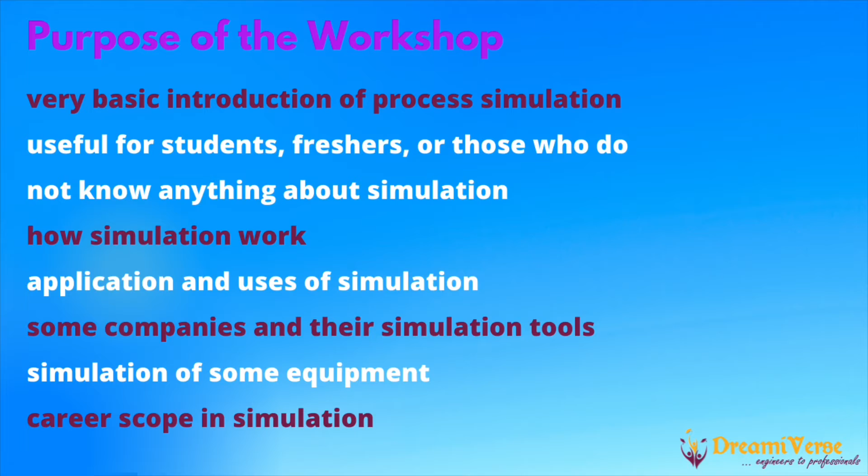So let me start with what is simulation. Now I am not talking about simulation related to the chemical industry specifically. Simulation overall is like a replica. You are making a replica of any actual system that will be used for the purpose it is developed for. This is software based, so definitely it is garbage in and garbage out. You might know the meaning of this phrase, that if you give the correct inputs, then only it will give you correct outputs.

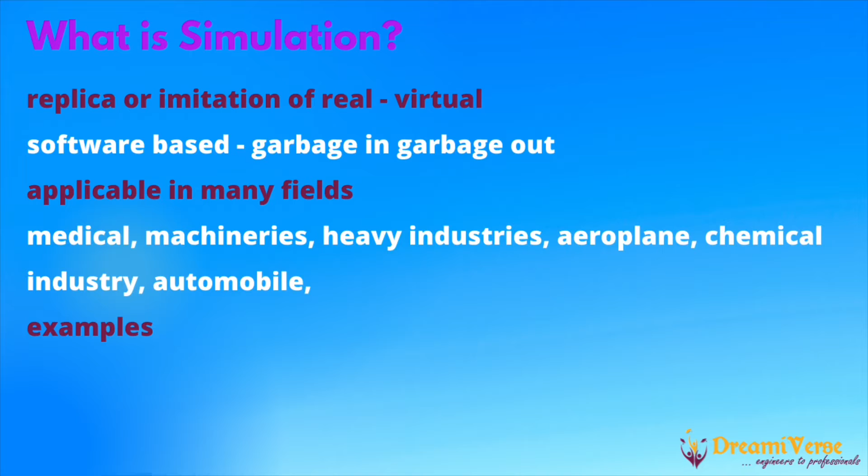So it's software based, and it is applicable in many fields like healthcare and medical, heavy machineries, heavy industries, or to train pilots in how to take off and land aeroplanes. And obviously in chemical industry, automobile industry, big electrical companies also.

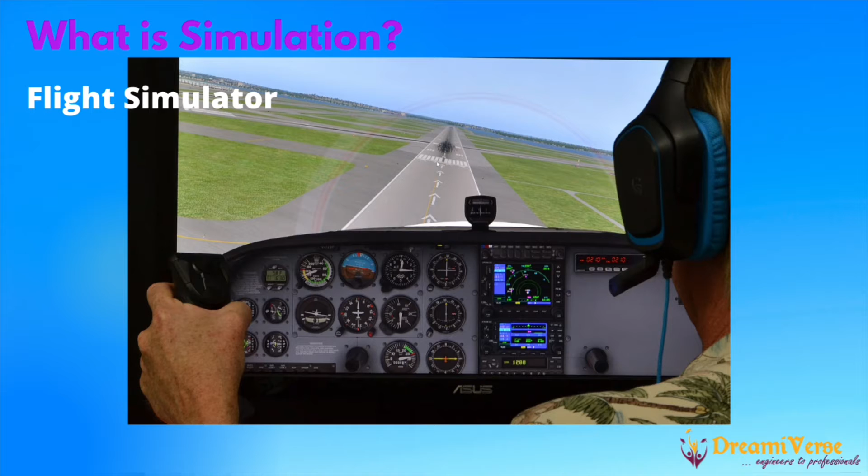Now we will come to process simulations related to our chemical industry, chemical plant. It includes oil and gas, refinery, petrochemicals, pharmaceuticals, so all chemical processes. Simulation is used for design of process or equipment. Design of process means it may have many equipments, or equipment may be one single equipment. Then analysis of the plant operation means we can do analysis of a running plant operation.

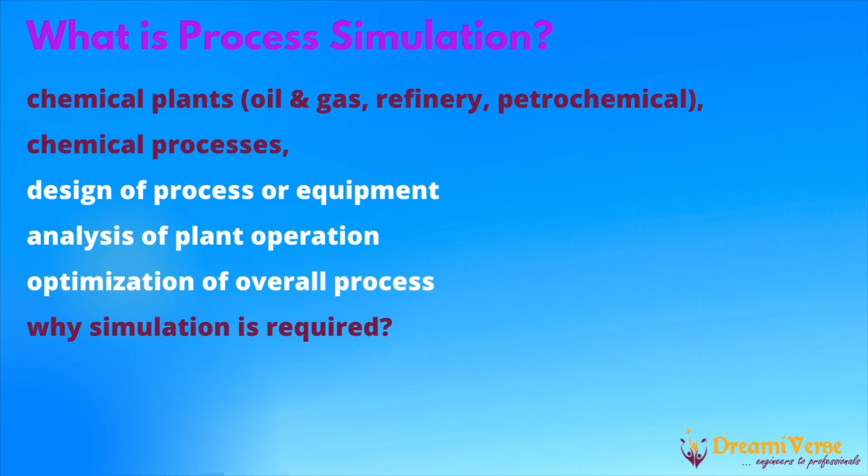So yes, that is also correct. Next is how it works principle. Gopal Krishnan, please mute yourself.

But how it works, behind that there is a program. There are differential equations, whatever we learned in thermodynamics and all the mathematics, all the differential equations we learn in whole engineering. Those are written behind that software, and writing that software is modeling, because many times we see these two words together, like in academic subjects or sometimes in a job profile, simulation and modeling engineer is required, or simulation and modeling as one of the subjects.

So the basic difference of simulation and modeling is that simulation is using the application, and modeling is developing that application. And definitely to develop that application there is a different platform, and for that a computer engineer will be working along with chemical engineering, all the aspects. Basically computer engineering plus chemical engineering together is the development of the software.

So basically the chemical and physical properties of all the chemical components form a mathematical model. This together forms the software, and that we use as a simulation.

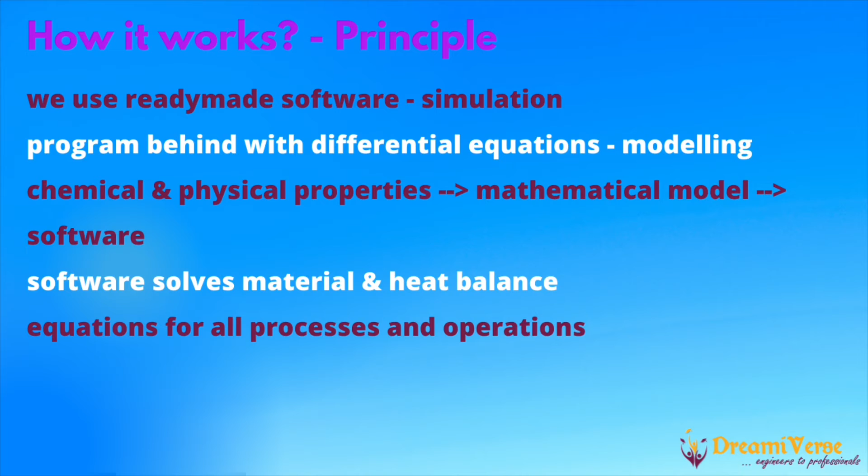Next is simulation. There are two types of simulations. Just let me check some questions.

Excuse me sir. Yes. My name is Naveen. Yes, Naveen Kumar. Sir, I have one basic question. What is the basic difference between simulation and optimization, sir?

Okay, simulation and optimization. Simulation means you are creating a virtual model. Let's say you take one example, heat exchangers. You are simulating a heat exchanger, meaning you have some data, or you need to calculate some data for that heat exchanger. Let's say you are going to design the heat exchanger. So based on that data, based on that requirement, first you are giving inputs and you are trying to calculate what is your requirement. So that, let's say, I can call simulation.

Now one step ahead, there is one exchanger, and the heat exchanger is designed. Let's say I am a design engineer, a process engineer, designing the heat exchanger. So basically, question for everyone again, when we say we are designing a heat exchanger, what exactly are we doing? What is our target point in case of designing the heat exchanger?

To calculate heat transfer area, exactly, yes. So basically we are calculating required heat transfer area for the required process. But required process means what? We have some inlet outlet temperature, inlet outlet flows, and we know the inlet outlet parameters of that chemical what we are using. Based on that I am designing the heat exchanger, and at the end, let's say I came to my result that 200 meter square area is required.

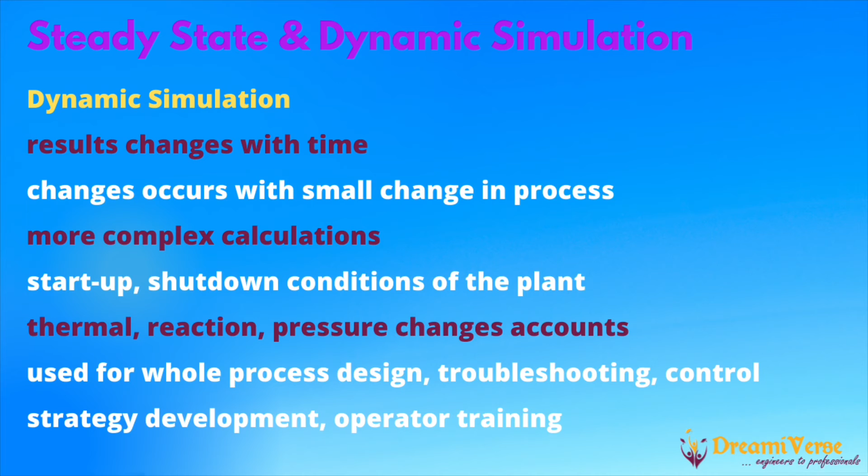And then operator training, I have a next slide specifically for operator training. Operator training simulator, OTS, you might have heard this word. The base for this OTS is dynamic simulation, and as the name itself suggests, it is used to train new manpower, maybe new operators, new engineers, or people transferred from one plant to another.

So we can train the operators for normal startup of the plant, let's say starting from zero. The normal shutdown of the plant, how to shut down normally. Then let's say if there is an emergency shutdown, what should be the actions by the operator. And if the plant is running normally, what parameters need to be monitored. All those things can be done, meaning people can be trained on the OTS.

So this is used for optimization of control schemes and logic validation, as I just explained. APC, advanced process control, is again a kind of part of optimization, we can say.

And what-if analysis means, okay, in most chemical plants it's not the situation that for months the plant runs very normally. There are always problems, so definitely you have a lot of work to do, in the actual plant also, depending on your role. If you are supporting the production, your role may be different. If you are a production engineer, your role will be different. But there are some situations, or opportunities, where you can check the what-if analysis. What-if analysis means, if we change some parameters.

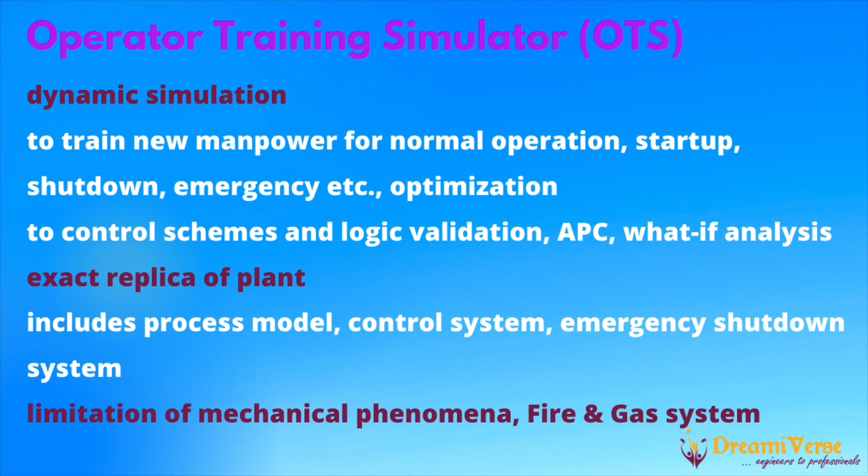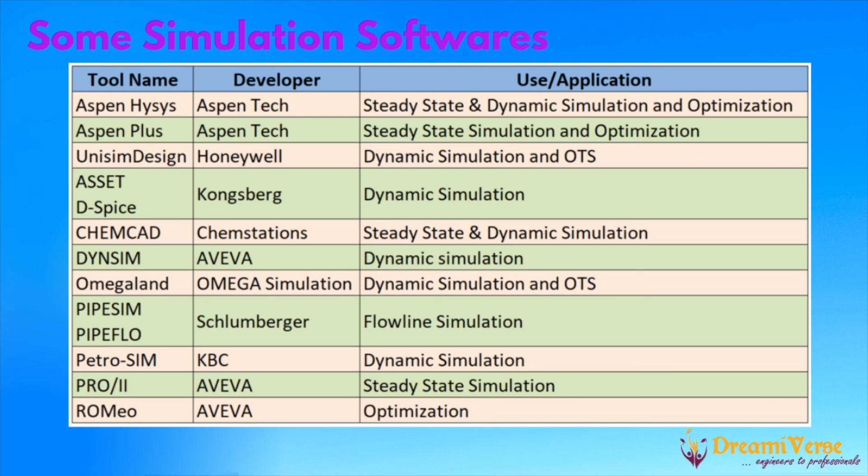PIPESIM and PIPEFLO by Schlumberger are especially used for pipeline simulations. Then PetroSim, again by KBC consultants. Then Dynsim Pro II and Romeo, these are by AVEVA. AVEVA is a new name, earlier it was Schneider, and before that Invensys. Romeo is used for optimization, real-time optimization, RTO we can say. So these are some of the softwares.

Career scope, I think I need not explain much, because in the last 20-25 minutes we saw the applications of simulation. So we can see where we can work if we have that kind of knowledge: process engineers who design equipment need it, dynamic simulation engineer roles exist in some companies, especially for engineering studies or dynamic studies. OTS developer, yes, Honeywell or Yokogawa, many companies are there. Process control engineer to develop control philosophy and control strategy. And then basic engineering companies, those who are licensors, who develop new processes.

Then detail engineering companies, meaning design companies like Toyo, Chiyoda, or Technip, many are there. So technical service in a production plant, the technical services name may be different in different companies, sometimes it's called task force, central technical services, or technical services. And then APC engineer, yes, to develop APC. APC is actually implemented on a running or actual plant, but to have some base data and base models, we can use OTS to develop that base knowledge. So yes, APC engineers also need to have knowledge of simulation.